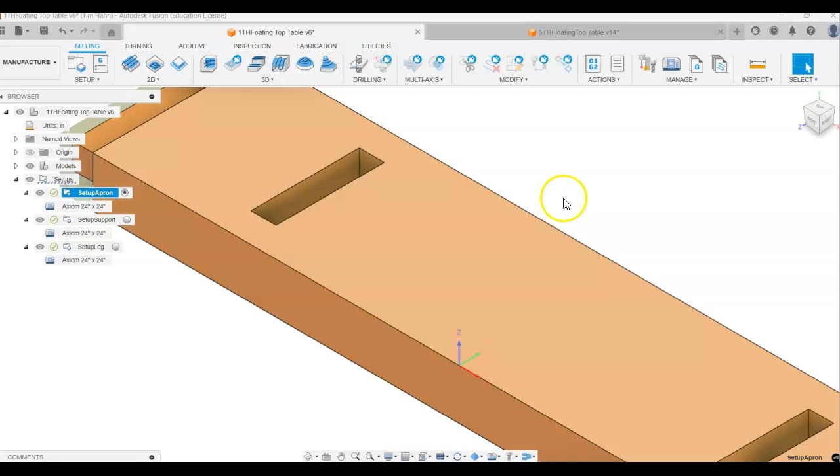Now it's time to do some toolpathing. Toolpathing is the actual programming. We're there. We're 2 steps away from being complete with Fusion. And you're doing a great job so far. Keep following right along and we'll be good to go.

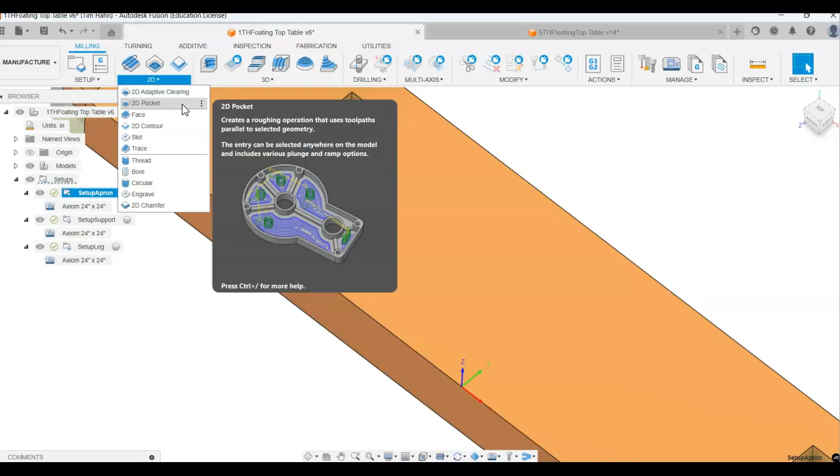So we're going to go 2D. And there's lots of different toolpaths to pick from. Engrave is the one that we've used in the past to do pictures. But we are going to do 2D Pocket. We're going to kind of walk right across in here. So it says Tool, Select. So I'm going to select the tool.

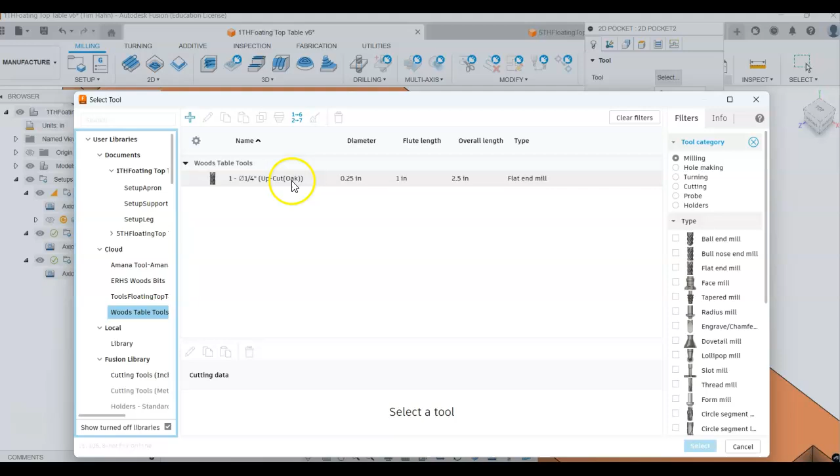If you remember, we're in Cloud. It's going to say No Tool Libraries. We want to do the Woods Table Tools. We've added that to the Cloud. If you didn't, go back 2 videos and you can see how to add this to the Cloud. And we're going to do Upcut Oak. And hit Select.

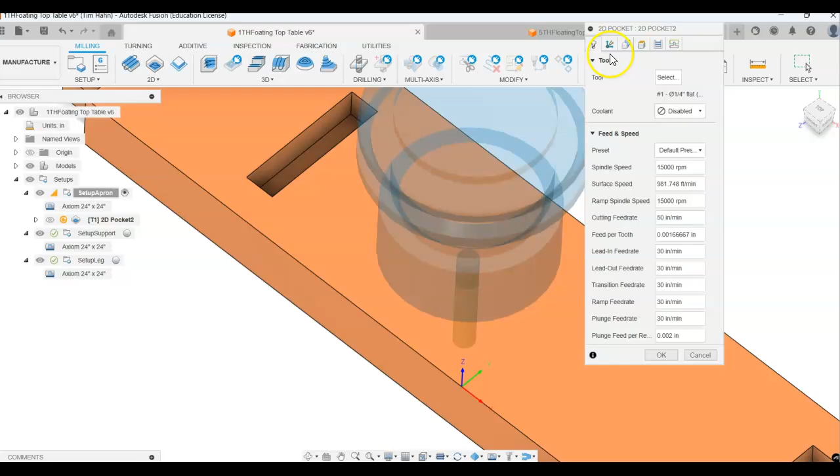Now I can see the tool coming right in on the origin. That's so awesome. It came in with all the settings here, the first one. I gave you all the settings. You don't have to do any of that. Multi-axis, we're never going to touch this because we only have a 3-axis machine. But geometry, we are going to use. So it says Pocket Selections.

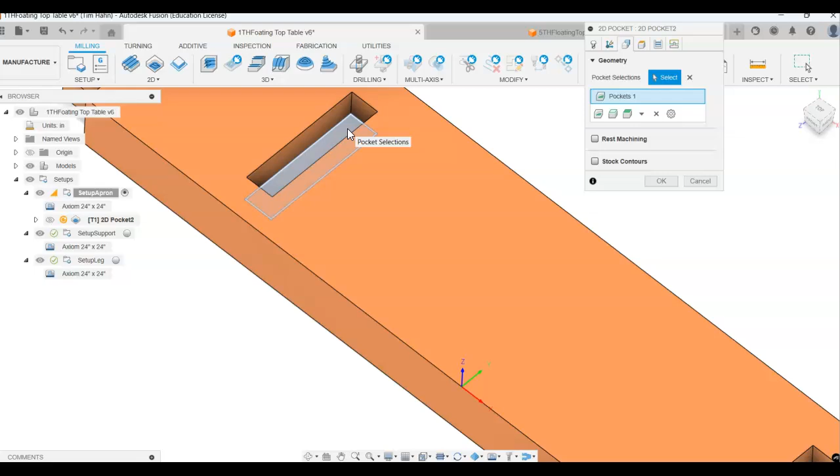So I'm going to come in here and I'm going to click this pocket. The pocket, I have to be on the bottom. Don't click the top edge, click the bottom. That's going to determine our height here in a second. Rest machining means we've already cut something, which we haven't, and stock contours don't matter for what we're doing.

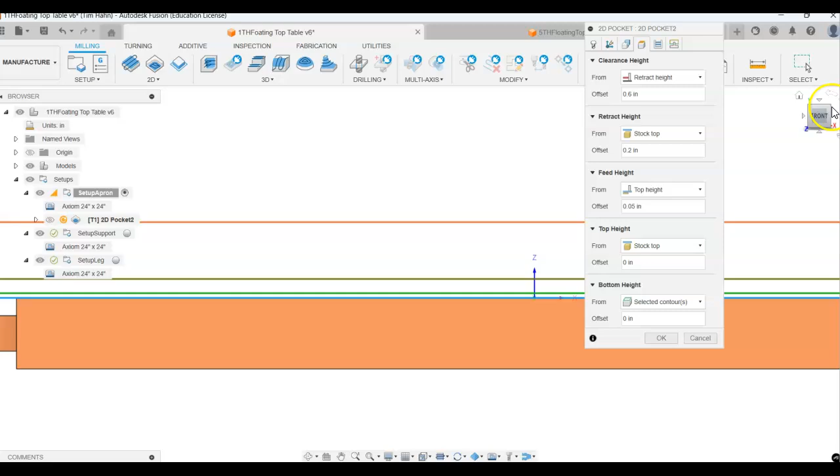The heights. This tab we do need to use. So this tab determines how high the bit is doing different steps. So our clearance height, we're going to set at 0.6, and we're going to go stock top, and we're actually going to go 0.8. So that means it's going to retract and clearance height is from the stock top, and it's 0.8. We're telling it that there's nothing 0.8 higher than the board.

Retract height, this is what it comes out of the stock, and that's going to go up 0.2 inches above the stock top. So we're good to go there. Feed height, from the top height is, again, the stock top. We want that to be 0.1 for the feed height. The top height, and we're going to say stock top again. We're going to keep managing stock top because that's what we want it to reference.

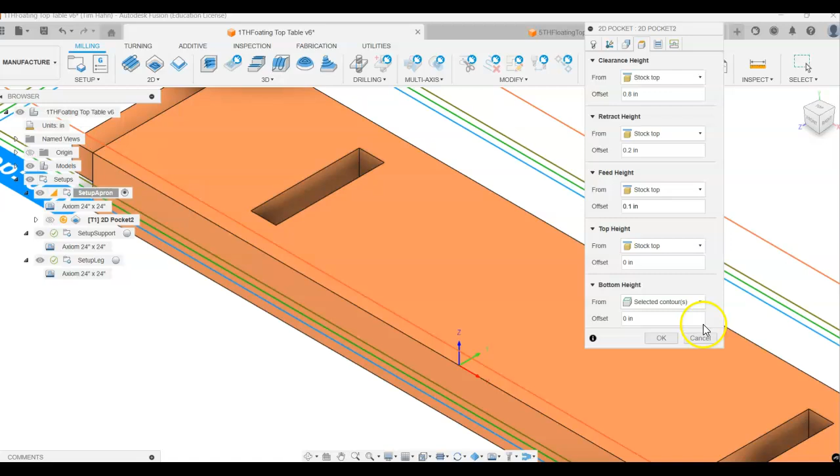The top height from the stock top, so the top of our board, is going to be 0. So the top of our cut is at 0. That's right at the stock top. And the last one, the bottom height, is the selected contours. So that means what I picked over here. That bottom pocket, and that's my bottom height.

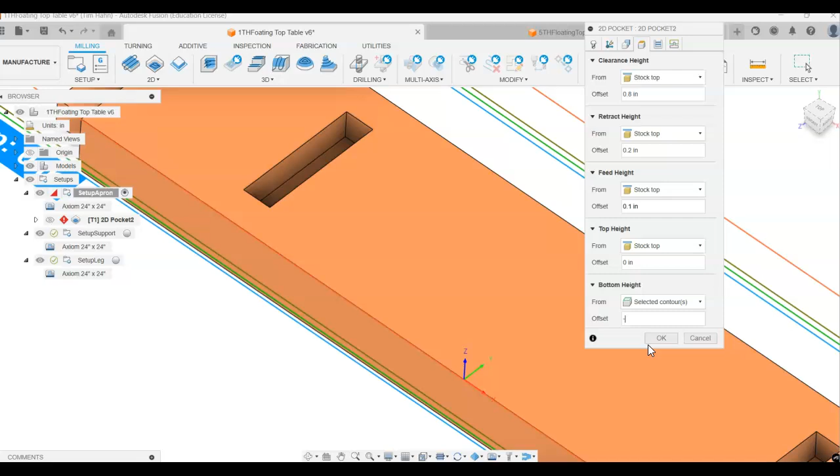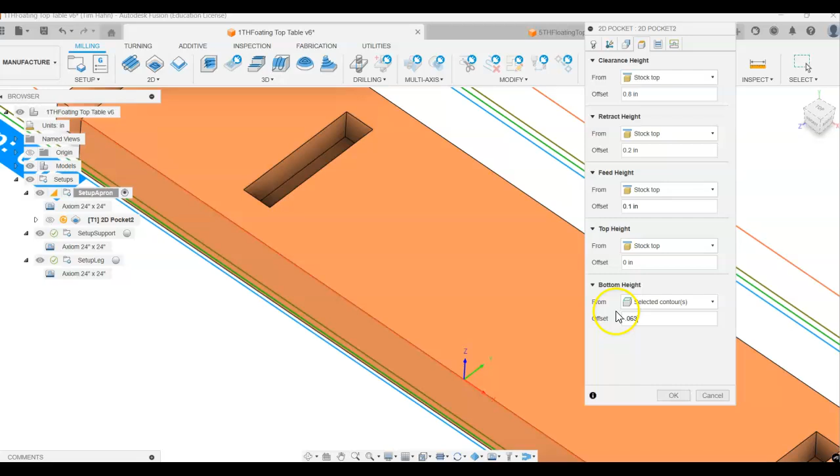But on this one here, we're doing a mortise, and we're going to have to put a board with some glue in there. So we're going to actually offset that. We're going to cut it too deep by negative 0.063. That's a 1/16 of an inch. We're going to cut it a 1/16 of an inch too deep. So we got that all taken care of. You can reference mine and make sure yours says the same. Pause the video here and do that if you need to.

Passes tab. Tolerance, all this first one, we're going to leave what it is. Just make sure it stays where it's at. Multiple depths, we're not going to do multiple depths at this point. Finishing passes, we're not going to worry about that yet. And the stock to leave. Axial stock to leave is 0, so that's in the bottom of the material. It tells you the axial is in the bottom, and the radial's on the side. So we're going to leave 20 thousandths of material around the edges.

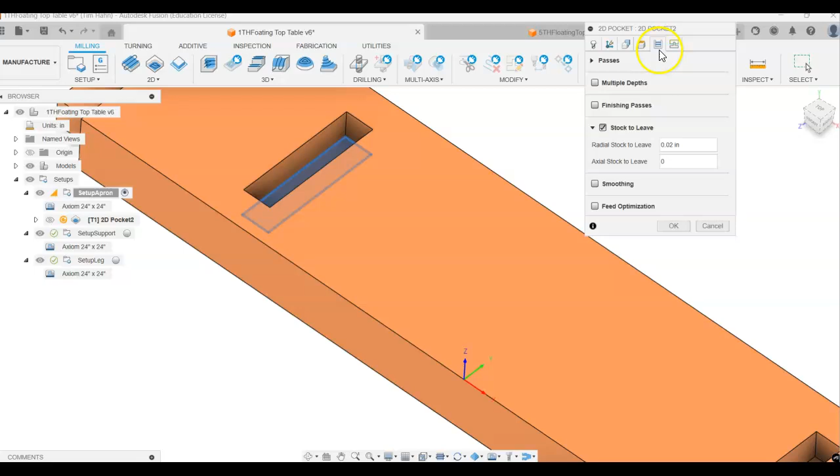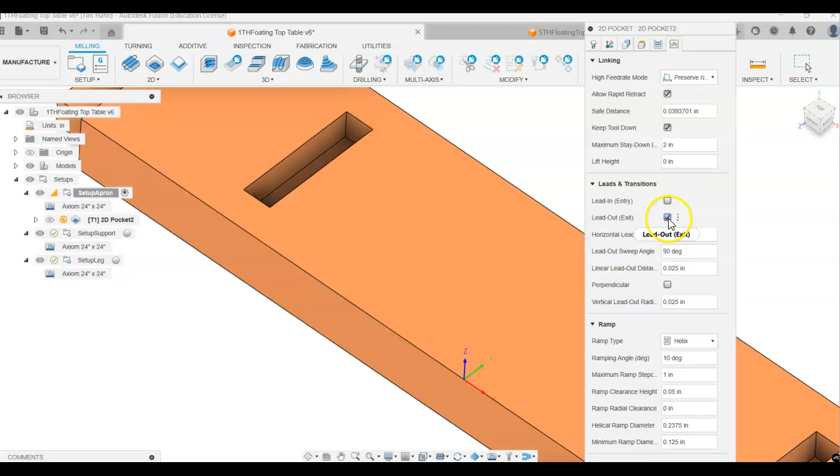Linking. Here's a few things we're going to have to do in here. The first one on linking we don't have to worry about. The next one where it says leads and transitions, I uncheck lead in. Lead in and lead out are both going to get unchecked. That is a little move that comes into the cut so it doesn't do right at the cut. I don't want to worry about that. My ramp type is a helix. Ramp angle should be 10 degrees. That's all set up right.

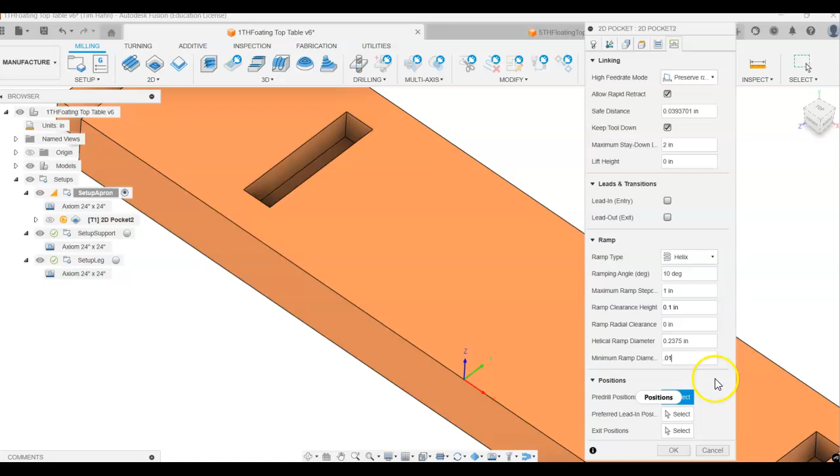The ramp clearance height, that should be set to 0.1. If that's red, that means you did a setting in your heights wrong. So go back to your heights tab and check all those. The next one we have to do is this minimum ramp diameter. This is 0.01. So what that means is that's how small of a diameter that thing can spin down there. And we're going to hit OK.

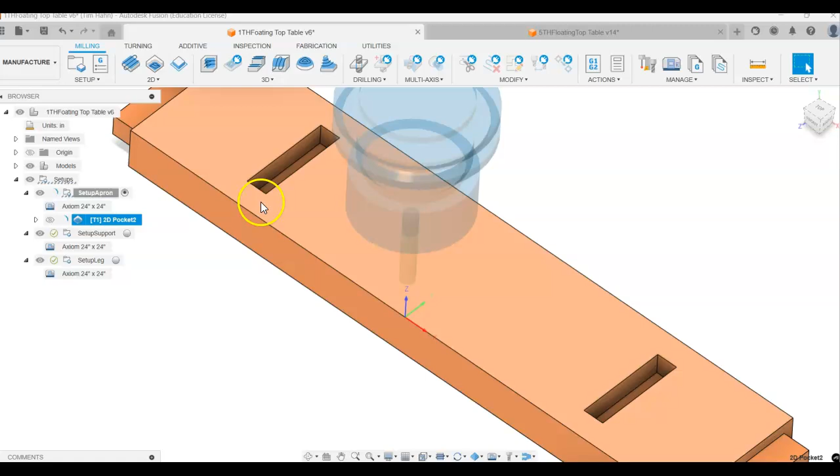And you're going to see it spin. And it's going to come up with a green check eventually. You can see that helix where it's spinning down. You can see it's cutting. It's leaving a little bit of material on both sides there. Boom, boom, boom, boom.

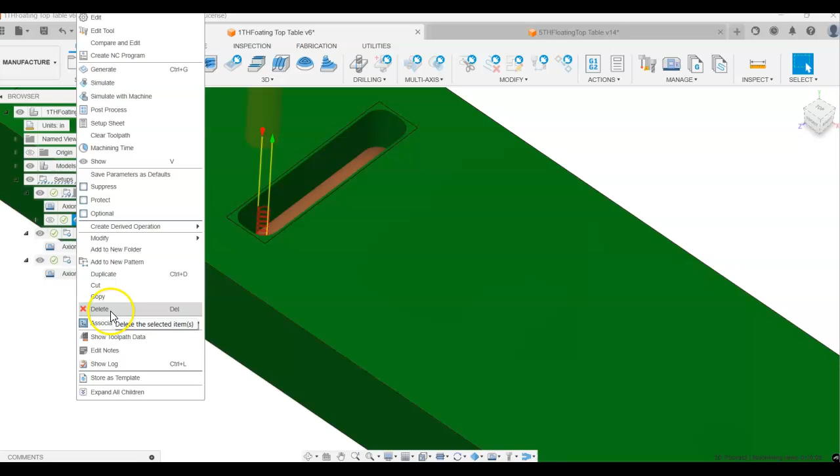And we just went through all the settings. If you get a warning here, right-click, delete, and go through the process again. You just have a setting wrong. Or ask me, and I'll be able to help you out and figure out the setting. Good luck on getting your first toolpath in Fusion 360 done.